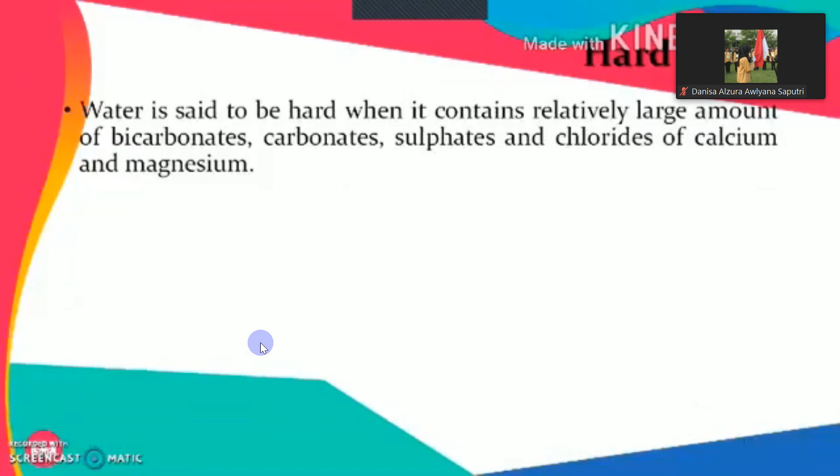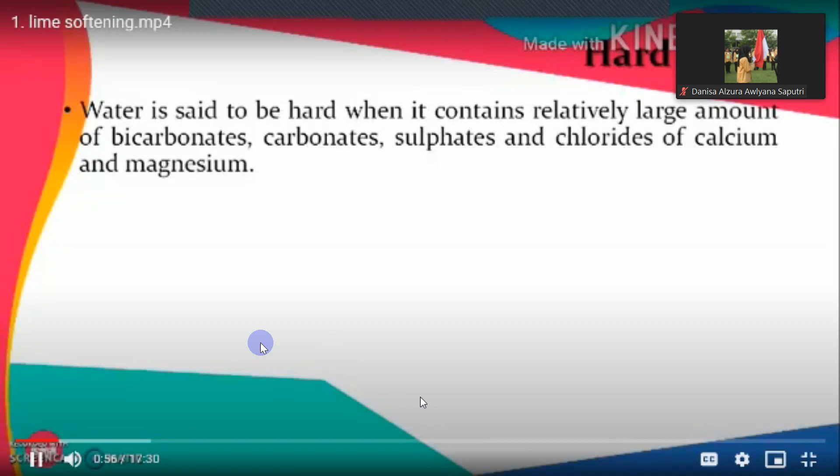So let's start the discussion with hard water. The water is said to be hard when it contains relatively large amount of bicarbonates, carbonates, sulfates and chlorides of calcium and magnesium. Thus, the calcium and magnesium are two minerals.

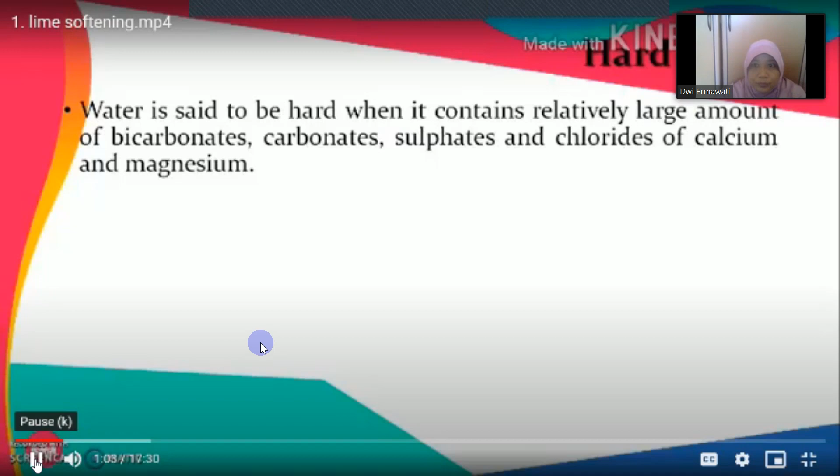Which are responsible to make water hard. These materials generally react with soap causing precipitation, because of which no lather can be formed until enough soap has been dissolved to react with all these things, and it results in not only heavy precipitation.

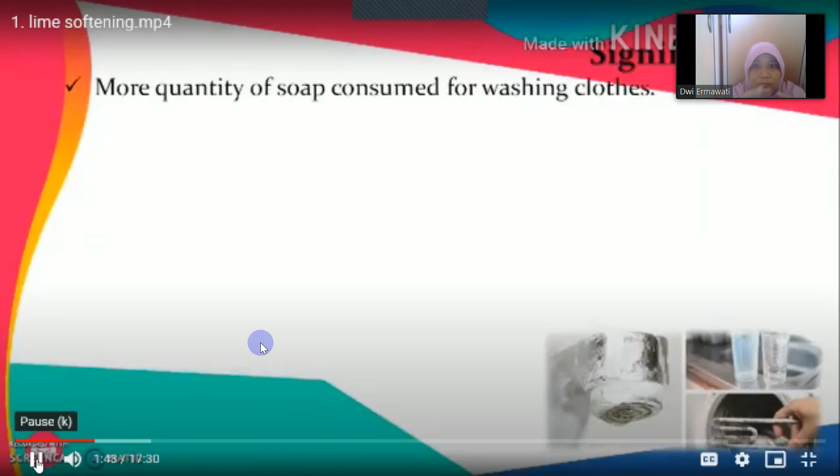But heavy consumption of soap. A wastage of around 25 ppm of soap takes place per 1 ppm of hardness of water removed by it. The significance of the hardness: as we have seen, in case of hard water, more quantity of soap is consumed for washing clothes, because of which even the fabrics of clothes get spoiled.

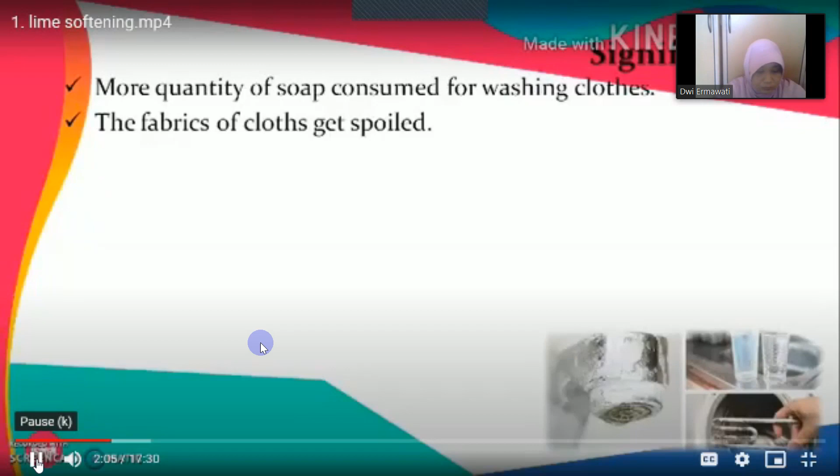This even has an equal significance in its industrial application, as the clothes in industry may be getting spoiled because of the use of hard water in various processes, right from manufacturing to dyeing of the clothes. Then, because of hard water, the taste of food gets spoiled. Stains on utensils and plumbing fixtures are much more common when hard water is used.

Hard water generally results in stains because of the precipitation of the temporary hardness on the surface of these things. Lesser efficiency of domestic water heaters. Then it even causes health issues like kidney stones. In industry, hard water forms scales in the boiler, due to which more fuel is required and the boiler metal overheats.

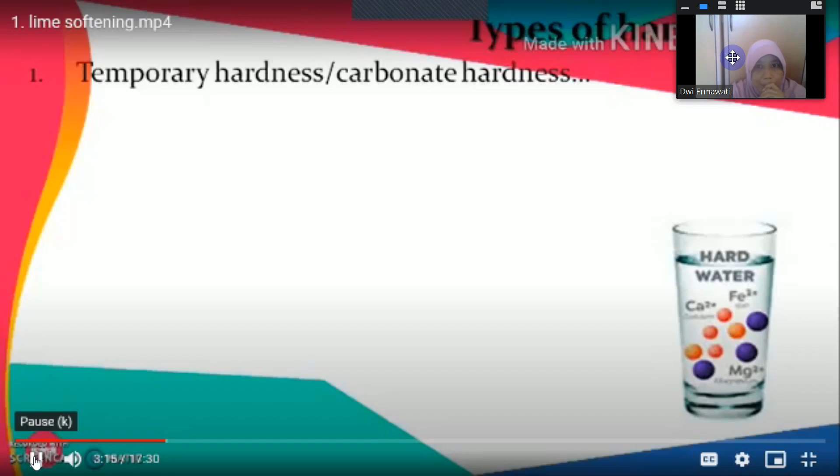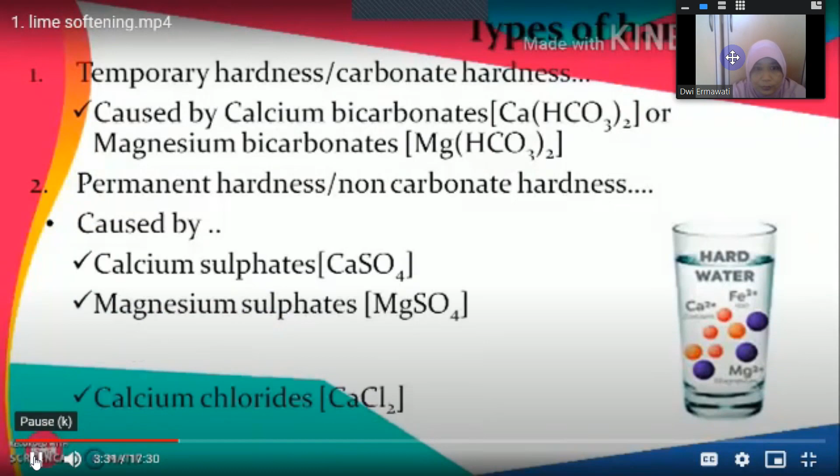The types of hardness. The hardness is divided into two heads, the temporary hardness and permanent hardness. Temporary hardness is even called carbonate hardness. This is caused by the calcium bicarbonates or magnesium bicarbonates. While the permanent hardness is called non-carbonate hardness, which is caused because of the calcium sulfate, magnesium sulfate, calcium chlorides and magnesium chlorides. Even on the basis of the total hardness present in water, the water...

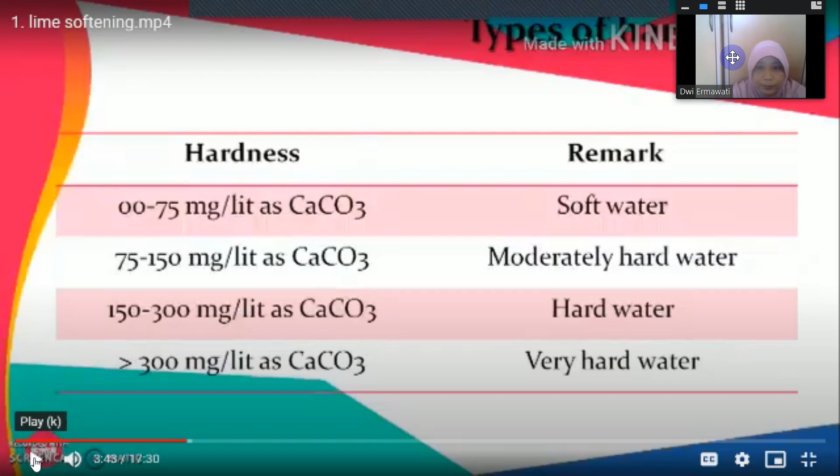Is generally divided under the four heads. If hardness is in a range of 0 to 75 mg per liter as CaCO3, it is called soft water. If that hardness is in a range of 75 to 150 mg per liter as CaCO3, it is moderately hard and is much better for consumption, as our body even needs a certain amount of minerals which can be supplied with the help of such hard water.

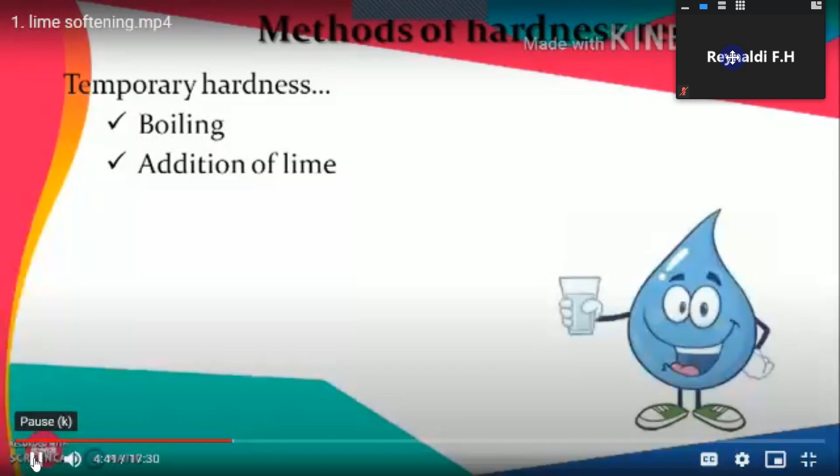If the hardness goes beyond it and is in a range of 150 to 300 mg per liter, then water is called hard water, while more than 300 mg per liter as CaCO3 makes water very hard. Now, how to remove it? The temporary hardness can be removed by boiling or addition of lime. As boiling is not practicable for mass purification, generally at water...

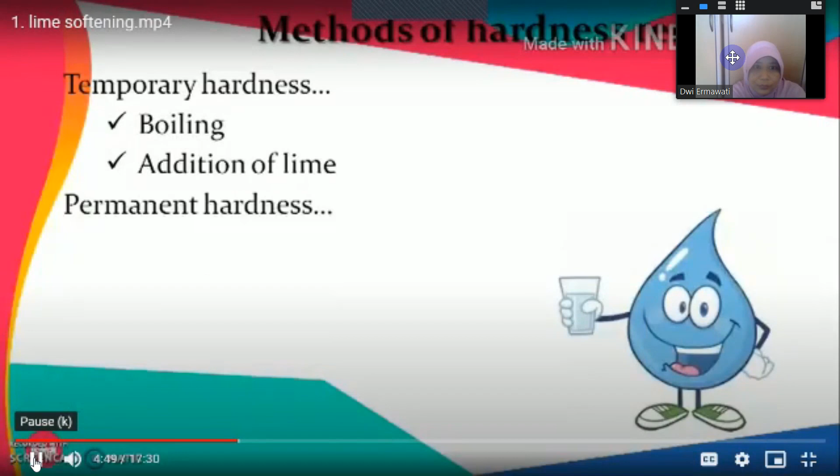Treatment plant, the addition of lime is practiced. While in case of permanent hardness, the removal is possible by using lime soda process, ion exchange method, and demineralization process. In this particular presentation, we are going to learn the lime soda process of removal of hardness.

Now, these are the certain chemical reactions which are happening when water is either heated or we add the lime in it. So when we heat the water, generally the temporary hardness which is present in terms of the carbonate hardness gets precipitated. Generally what happens is that when we heat the water, carbon dioxide gets released, and in the presence of carbon dioxide, the carbonate hardness is generally in dissolved state. But once the carbon dioxide concentration gets reduced, it becomes insoluble and precipitates.

The similar thing happens in case of MgHCO3 too. While in case of addition of lime, the precipitation of the carbonate hardness happens, and because of which the temporary hardness gets reduced.

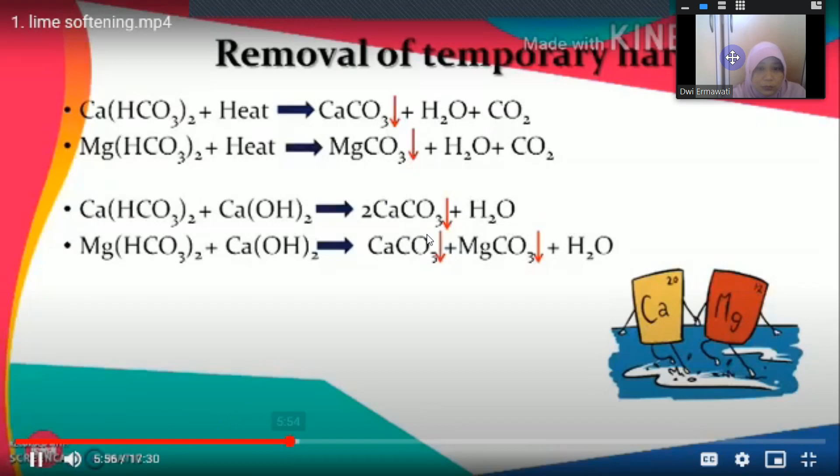In case of permanent hardness, we need to add soda ash along with the lime so that the total hardness can be removed. This is the most common method used at water treatment plants where the expected hardness is to be reduced to a certain level so that it can be supplied.

When lime soda ash has to be done, generally one needs to install the lime soda softening plant. This lime soda softening plant is very much similar to what is practiced in the coagulation and flocculation process, what we have learned in our previous sessions.

These plants generally consist of 4 different units. Those units are feeding or mixing devices, followed by the settling basins, then a recarbonation or stabilization plant, and finally it goes through the filters.

One needs to install the lime soda softening plant. In a lime soda softening plant, lime helps in removing the entire carbonate hardness, while non-carbonate hardness is removed by soda ash. Lime also helps in removing the free dissolved carbon dioxide. The amount of lime and soda ash required for the softening depends upon the chemical quality of water and the extent of hardness removal desired.

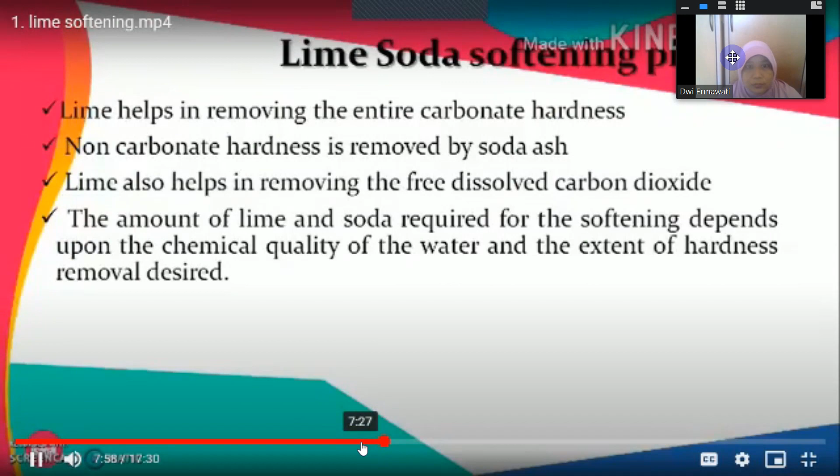The equipment required for lime soda treatment is similar to that required for chemical coagulation. The lime and soda ash are added to raw water either separately or together and are well mixed with water. Flocculation and sedimentation then follow. The feeding, mixing and settling devices are similar to those used in coagulation cum sedimentation. The only difference is that the detention time for the settling basin is higher in a lime soda softening plant, in the range of 2 to 4 hours.

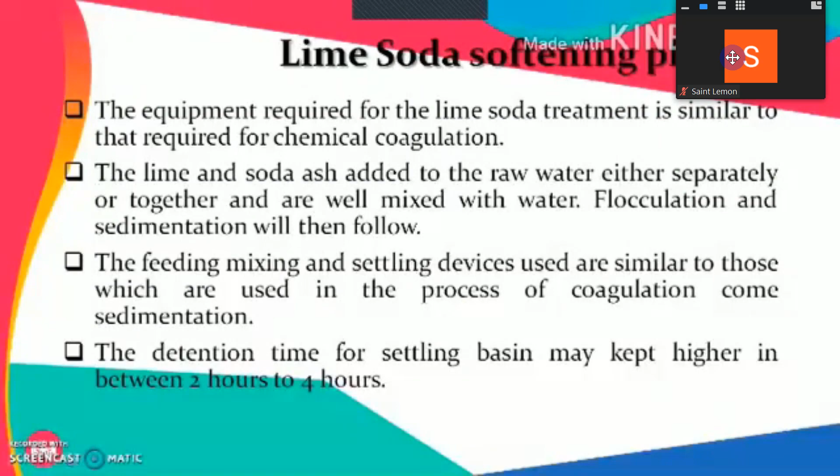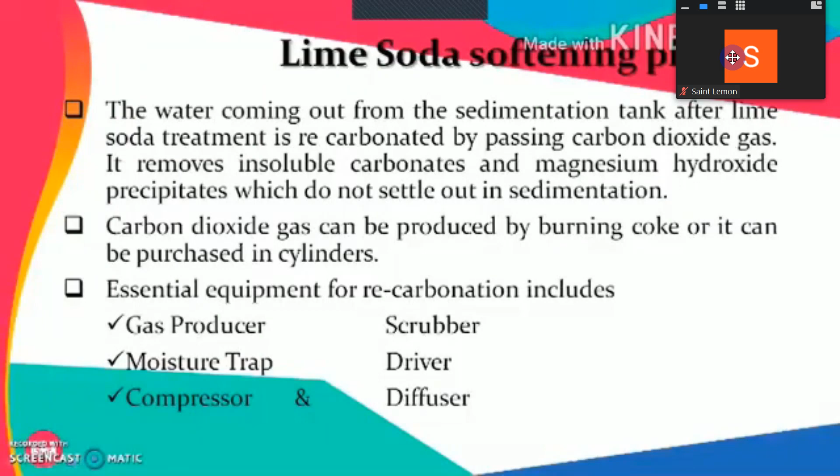Generally, in the lime soda softening plant, the water coming out from the sedimentation tank after lime treatment is recarbonated by passing carbon dioxide. This is the only difference or the additional unit one needs to provide, where one needs to recarbonate the water. This is essential for the removal of insoluble carbonate and magnesium hydroxide precipitates, which sometimes do not settle out in normal sedimentation tanks.

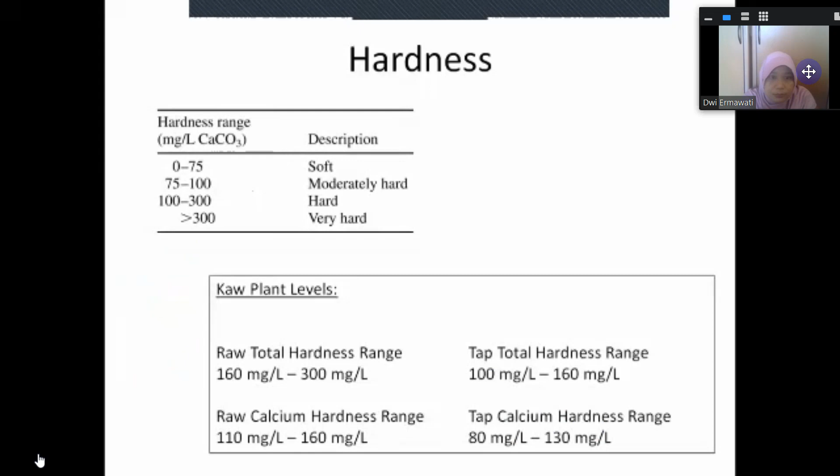Some rules of thumb of when water is considered hard or soft. Anything over 100 milligrams per liter calcium carbonate is described as hard. Typically, we would like our water to be around 75 to 100 milligrams per liter calcium carbonate.

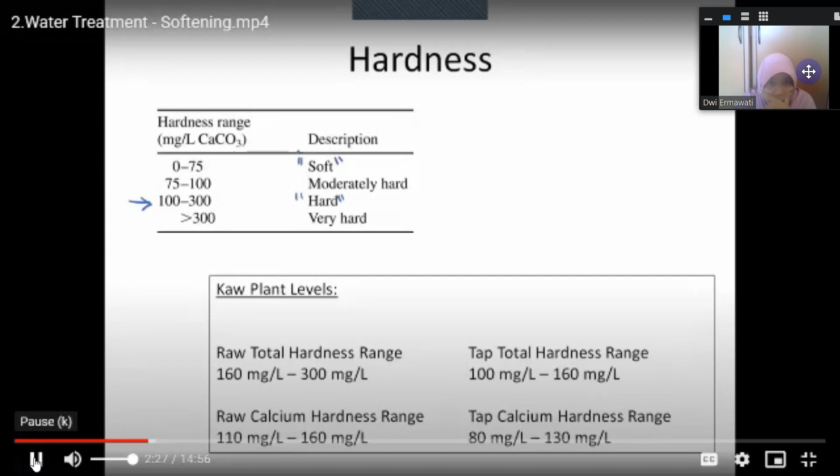Anything that's less than that is called soft and has an opposite problem in that it feels very difficult to remove soap when you're washing your hands. Okay, I said that total hardness can also be defined in terms of the carbonate and the non-carbonate hardness. Carbonate hardness is described as the calcium and magnesium content that is associated with the carbonate anion. So when you have a cation, magnesium or calcium, it would be associated with some sort of anion. And when that anion is HCO3 or CO3, then we would say that it is carbonate hardness.

Now understand that in solution, these are dissociated, however. So carbonate hardness would equal the total alkalinity or the total hardness, whichever is less. Carbonate hardness is actually fairly easy to remove from water systems, and so it is sometimes referred to as temporary hardness because heating the water typically removes it. And that's why hot water heaters have a lot of deposits on them.

Now, non-carbonate hardness is calcium or magnesium concentration that is associated with other anions. So anything other than HCO3 or CO3. And non-carbonate hardness equals the total hardness minus the total alkalinity. It is sometimes referred to as permanent hardness because it is more challenging to remove from water.

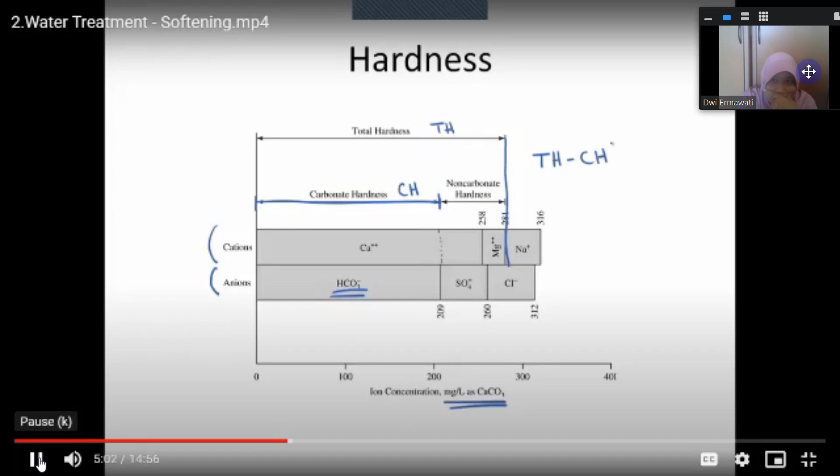But the anion bicarbonate is only paired with a portion of that calcium. And so the carbonate hardness is a subset of the total hardness in this example. The non-carbonate hardness is simply the difference between TH minus CH, total hardness minus carbonate hardness.

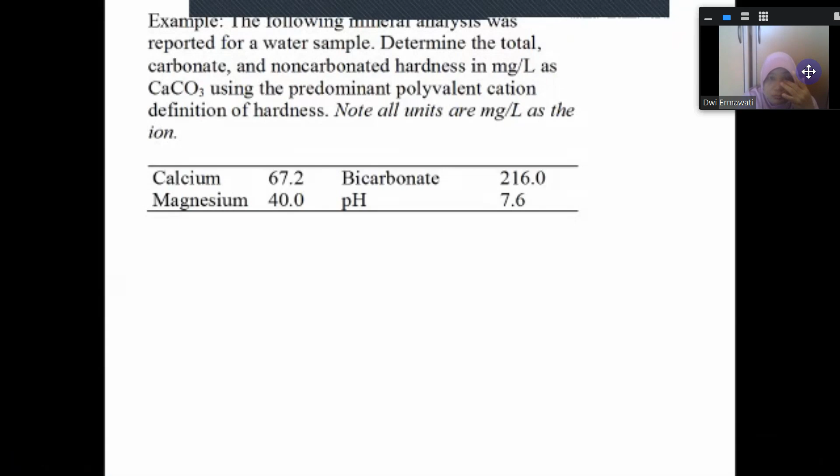We're going to work an example now where I give you the milligram per liter concentrations of minerals, and you're asked to determine the total, carbonate, and non-carbonate hardness in milligrams per liter calcium carbonate. The approach here will be to convert all milligram per liter concentrations to milligram per liter calcium carbonate concentrations, and then to use the equations for total hardness, carbonate hardness, and non-carbonate hardness. I'm going to do my conversions by establishing a table.

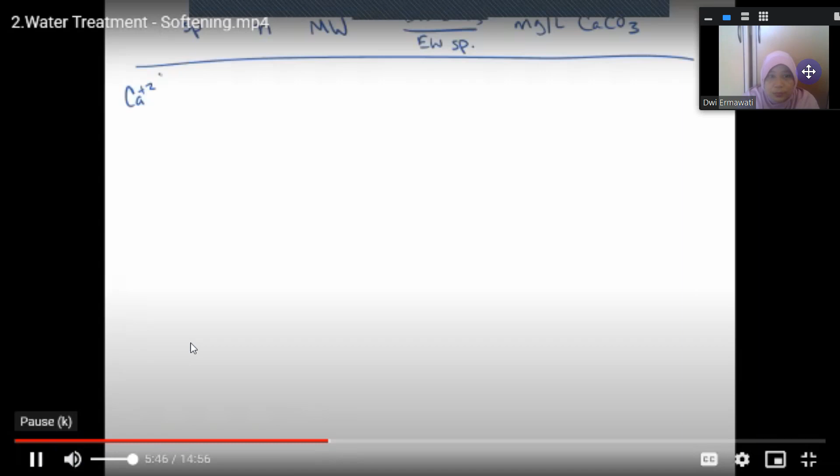Calcium was given as 67.2 milligrams per liter. The equivalent number for calcium is 2. The molecular weight is 40. The equivalent weight of calcium carbonate is 50, and the equivalent weight of calcium will be 40 divided by 2 milligrams per milliequivalent.

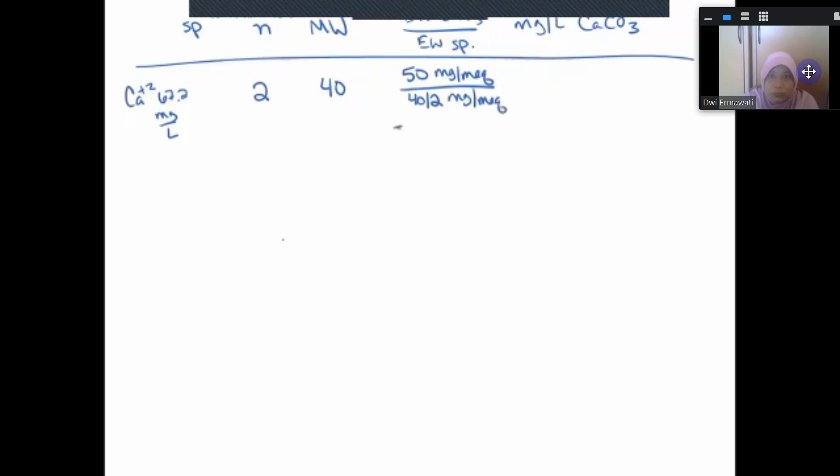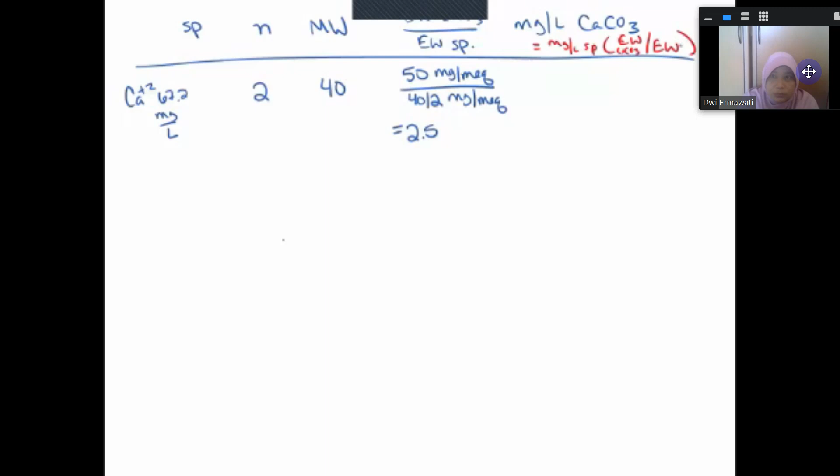This equals 2.5. Recall that the milligram per liter calcium carbonate is equal to the milligram per liter of the species times the equivalent weight of calcium carbonate over the equivalent weight of the species. So I say 67.2 milligrams per liter times 2.5, and this 2.5 comes from here. That is equal to 168 milligrams per liter calcium carbonate.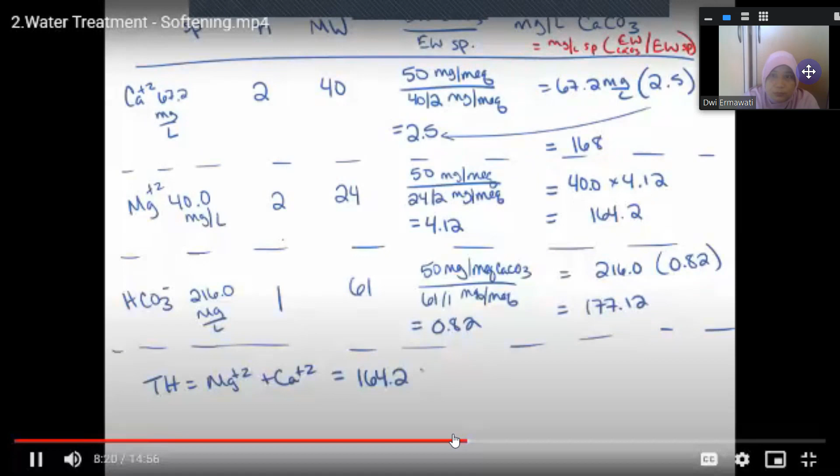The milligrams per liter calcium carbonate. Okay, so the total hardness is equal to magnesium plus calcium in terms of milligrams per liter calcium carbonate. That is 164.2 plus 168, which gives 332.8 milligrams per liter calcium carbonate.

The carbonate hardness is equal to the alkalinity or the total hardness, whichever is less. In this case, alkalinity is 177.12, and that is less than the total hardness. So we will choose the alkalinity as the smaller value, 177.1 milligrams per liter calcium carbonate.

And the non-carbonate hardness is equal to the total hardness minus carbonate hardness: 332.8 minus 177.1 equals 155.7 milligrams per liter calcium carbonate.

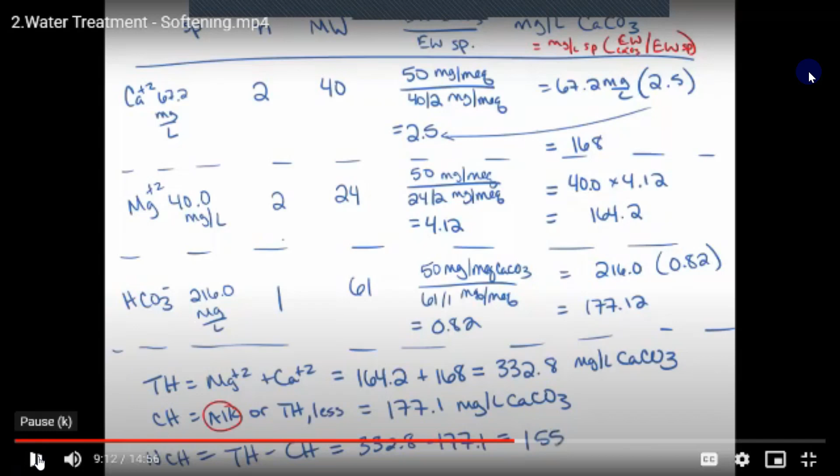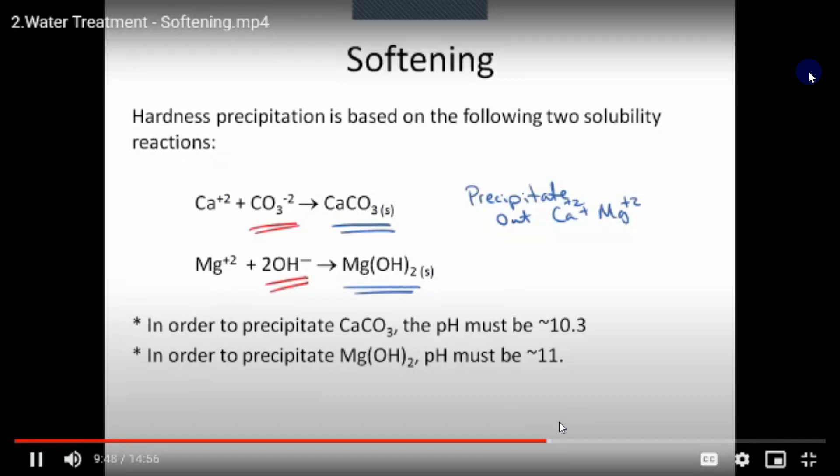And magnesium hydroxide. We remove hardness when we precipitate out calcium and magnesium. In order to precipitate out calcium carbonate and magnesium hydroxide, you must have carbonate and hydroxide ions present. As you'll recall from the carbonate cycle, carbonate ions are dominant after the pK from bicarbonate to carbonate. So for these to be highly present, you need a pH of at least 10.3 to get good precipitation of calcium carbonate. This has to do with the transition from bicarbonate to carbonate in the carbonate cycle.

For magnesium hydroxide, you need a pH of around 11. At a pH of 11, you would have a hydroxide molar concentration of 10 to the negative 3, and this shifts the solubility reaction to the right.

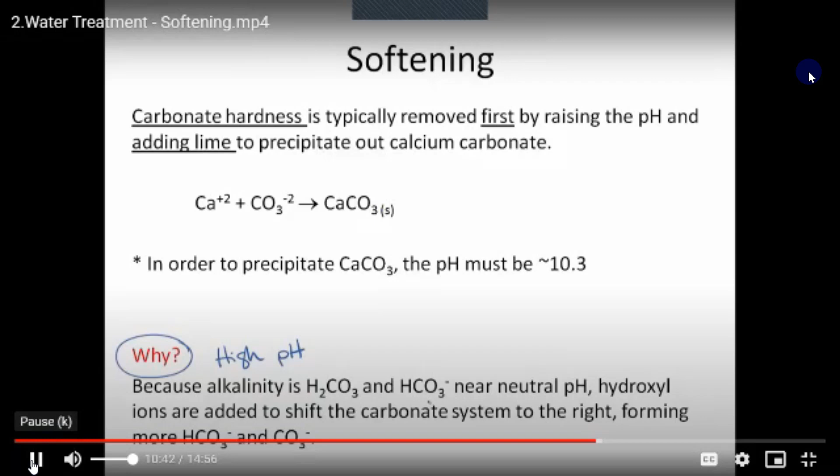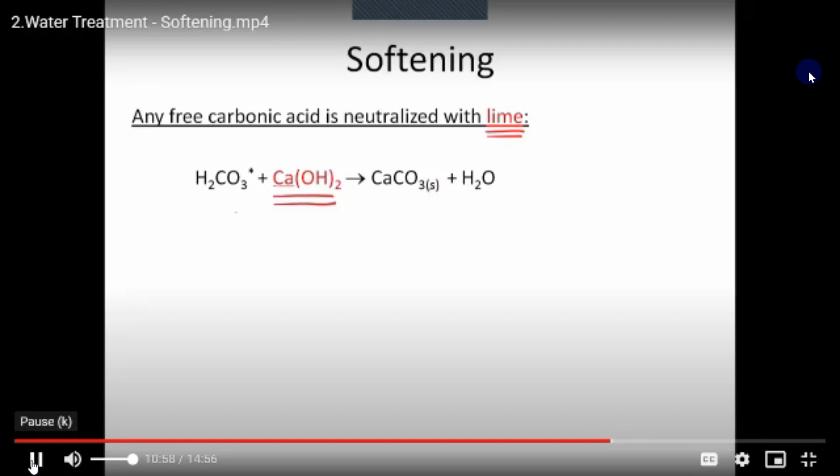Now, if all available alkalinity has been used to precipitate out calcium and magnesium, then you have removed all of the carbonate hardness. Any addition of chemicals beyond that point targets non-carbonate hardness. Non-carbonate hardness requires the addition of sodium carbonate, commonly known as soda ash. It is impossible to precipitate calcium carbonate without carbonate being present. So if all alkalinity is used up, sodium carbonate adds that carbonate and allows for additional precipitation to occur.

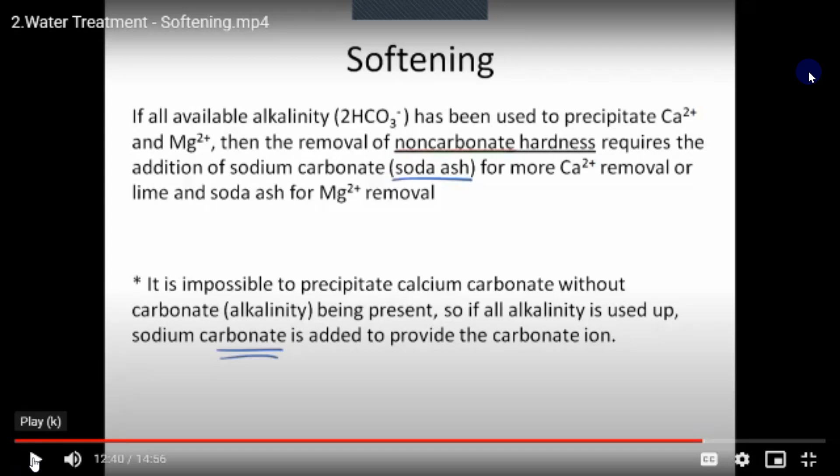So when we're targeting non-carbonate hardness, we add sodium carbonate. The carbonate combines with the calcium to precipitate out calcium carbonate, and it produces sodium. Lime would also be added at this point. The hydroxides in the lime would react with magnesium to precipitate magnesium hydroxide, and the calcium that is released from this would react with additional soda ash to precipitate more calcium carbonate.

So this is the first reaction of soda ash reacting with calcium. This would be calcium non-carbonate removal. And in these reactions, you have magnesium non-carbonate removal, which actually involves two reactions, because in the first, you release calcium, which then has to be combined with more soda ash. Otherwise, you're adding hardness back into the system.

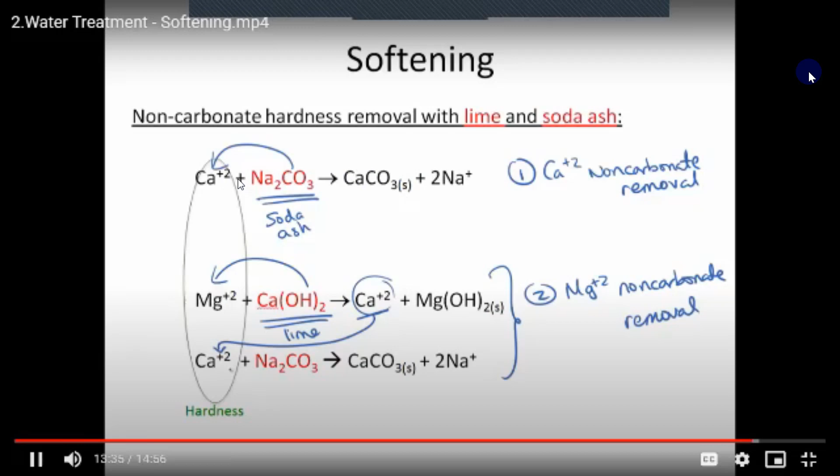Be combined with more soda ash. Otherwise, you're adding hardness back into the system. So in discussing softening, it's important to understand that excess lime softening has the potential to leave residual amounts of calcium in the water. This is particularly true when non-carbonate magnesium removal is performed with lime. The second point to excessive lime softening is to appreciate that you have to raise the pH to greater than 10.3, and if you're doing magnesium removal, around 11.

After you've done the softening and precipitation and sedimentation, it is very critical that you recarbonate the system to bring the pH down. And bubbling in that CO2 recarbonates the water because it adds these back into the soluble form, and it also lowers pH.

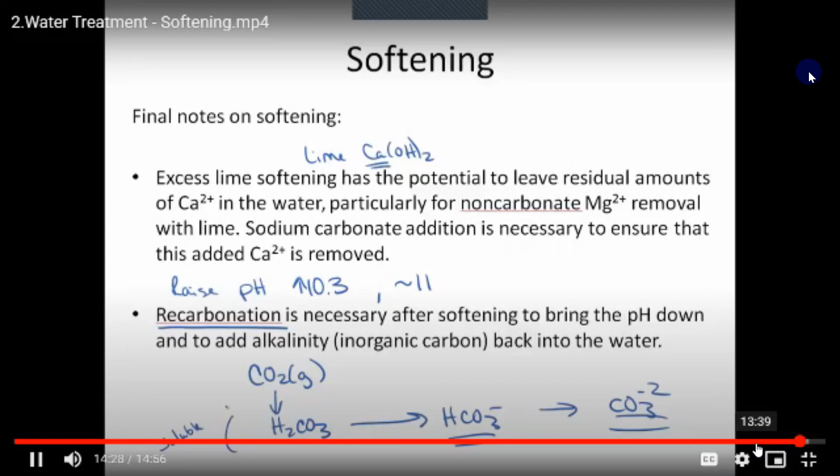Let's see where this fits into the treatment train. If we have a softening plant, you have raw water that comes in, you add lime or soda ash. If you want to do non-carbonate hardness removal, you go through flocculation, sedimentation, and then you recarbonate by pumping in CO2 gas. You finally filter, and you push that softened water into the distribution system.

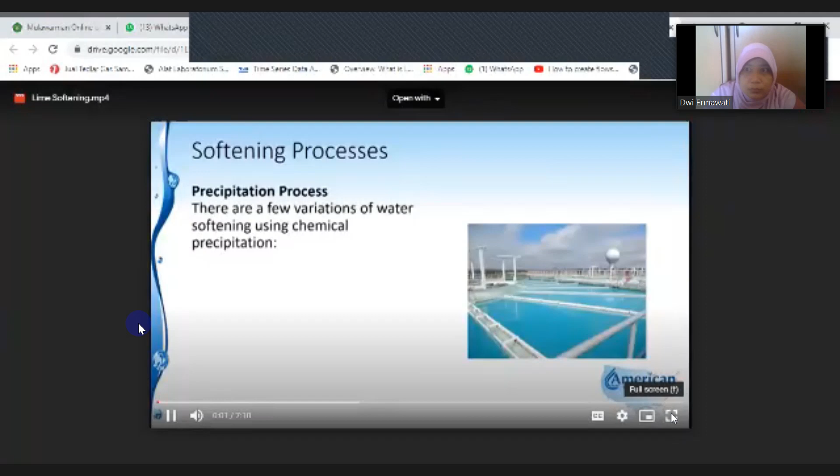There are a few variations of water softening using the chemical precipitation process. There's lime softening. There's also lime soda ash softening. There's also a process called excess lime treatment, and that's used to remove larger quantities of magnesium. And there's also a method called split treatment in addition to caustic soda treatment. Now, the caustic soda treatment is more expensive than the other methods and is infrequently used, so we're not going to discuss that any further in this lesson.

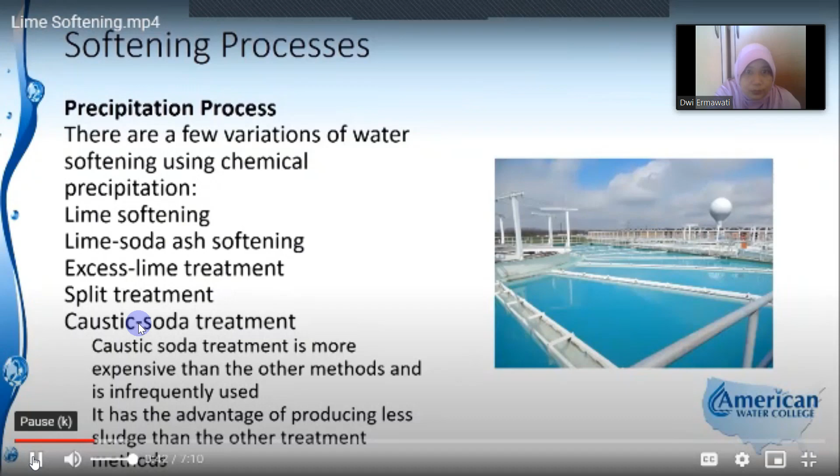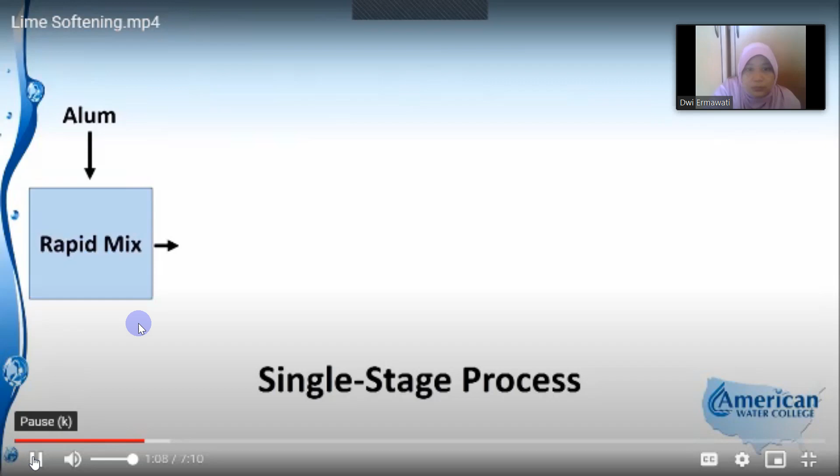However, it does have the advantage of producing less sludge than the other treatment methods. Well, let's take a look at the most common method of softening water, and that's the single-stage process. And it's very similar to a conventional treatment plant in that it starts with a coagulant added, and in this case we're showing alum being added to the rapid mix tank. And then the water and the alum and the coagulated water moves on to the flocculation chamber. From the flocculation chamber, it goes into the settling basin.

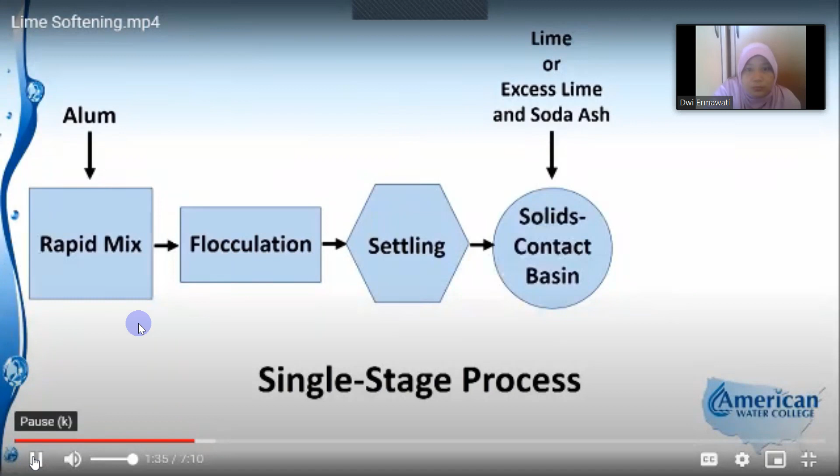And then from there, this is where we begin the softening process. It flows into a solids contact basin. And to the solids contact basin, we add either lime or excess lime and soda ash. It depends on the makeup of the water and what we're trying to accomplish. Well, calcium begins to precipitate out at a pH of 9.4. And if our hardness is primarily due to calcium hardness, we might just add lime and raise the pH to 9.4 in the solids contact basin, and that will provide the softening for us. But if we have a considerable amount of magnesium, say greater than 40 milligrams per liter, we might use the excess lime and soda ash method, in which case we'll raise the pH to 10.6.

Well, following the softening portion where we add the lime or the lime and soda ash, we have to bring the pH back down because high pH water would cause a problem with several things. One, the disinfection process, but two, it'll cause scaling in the distribution system. So we send it through what's called a recarbonation process, and that's where we add carbon dioxide to the water, and that brings the pH down to a range of 8.6, so it's more stable.

So this right here is what we'd call the single stage softening process. From here, once we've recarbonated the water.

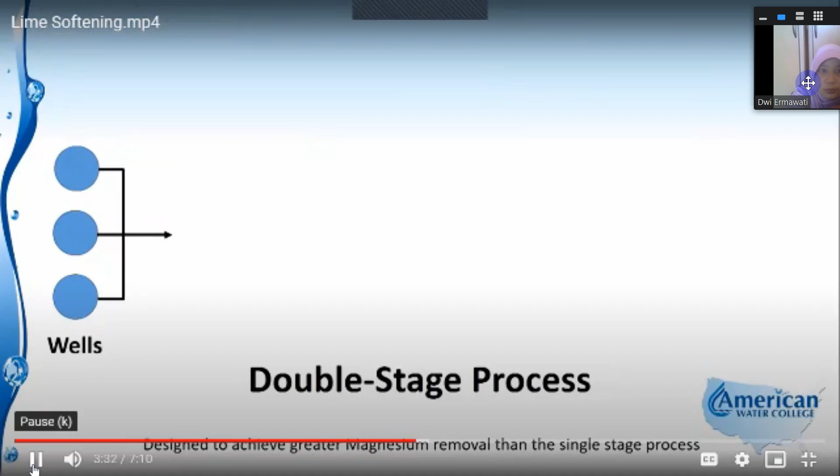And for our example here, we're going to take some groundwater from multiple wells and send them to the treatment plant. Because this groundwater is too hard, we're going to send it through a double stage process. So the first part of the process is we send it to a solids contact basin where we add excess lime. So again, because we're trying to remove magnesium, we're going to add extra lime to get the pH up to 10.8 or thereabouts, anywhere over 10.6 to get the magnesium to precipitate out.

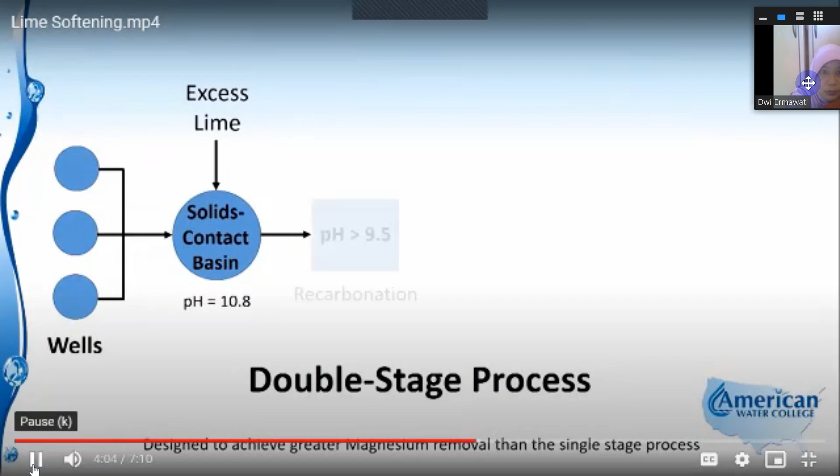After that process, it goes through a recarbonation process where we bring the pH down, but we don't want to lower it below a pH of 9.5 because at 9.4, 9.5, that range is where the calcium begins to precipitate out. So this first stage, we raise the pH to 10.8, and that's primarily to deal with the magnesium in the water. And then we move on to the second stage of our double stage process, and we send it to another solids contact basin where we add soda ash.

Then we send it through a recarbonation process again. That's the second stage. Now this second stage where we add soda ash, we do that to remove the non-carbonate hardness. Okay, so the first stage is removing the carbonate hardness, and the second stage is intended to remove the non-carbonate hardness, and that's why we add the soda ash.

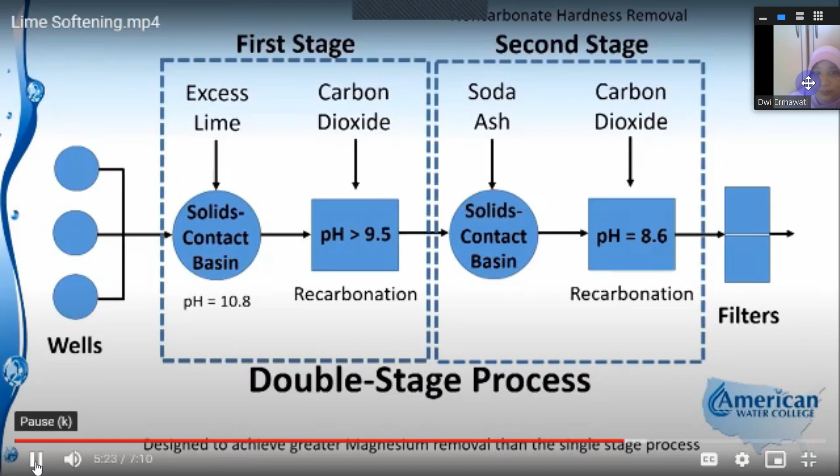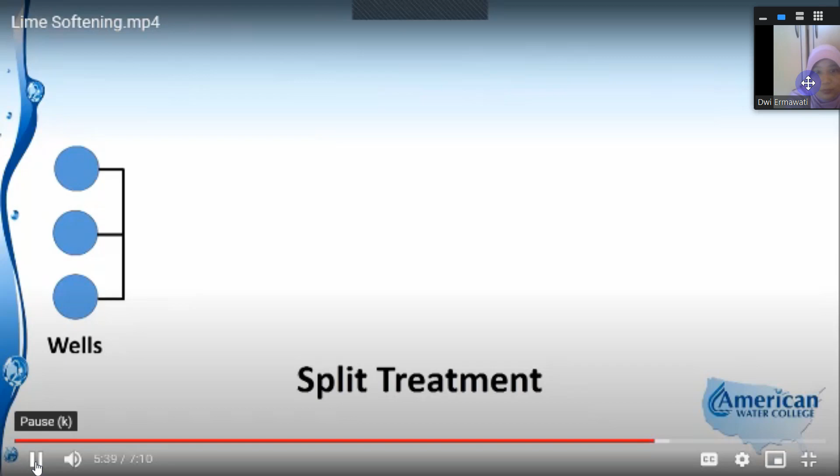This last method is called split treatment. This is a variation of the softening process intended to reduce chemical usage. And it's basically you're just splitting your flow stream. So assuming we have some wells, some groundwater that's hard, it'll flow into a flow splitter. And from there, it'll go one of two places.

It'll go into the rapid mix, where we add some polymer or some type of coagulant, and then into a solids contact basin, where we add lime or excess lime, depending on what our treatment objectives are. And then it'll flow from there into the next process.

But back to the flow splitter, we can bypass the rapid mix and the solids contact basin through this flow control valve, and this allows us to treat part of the water. So we're bypassing some of the flow, which is going to maintain the hardness and the alkalinity, and a portion of the flow we'll treat.

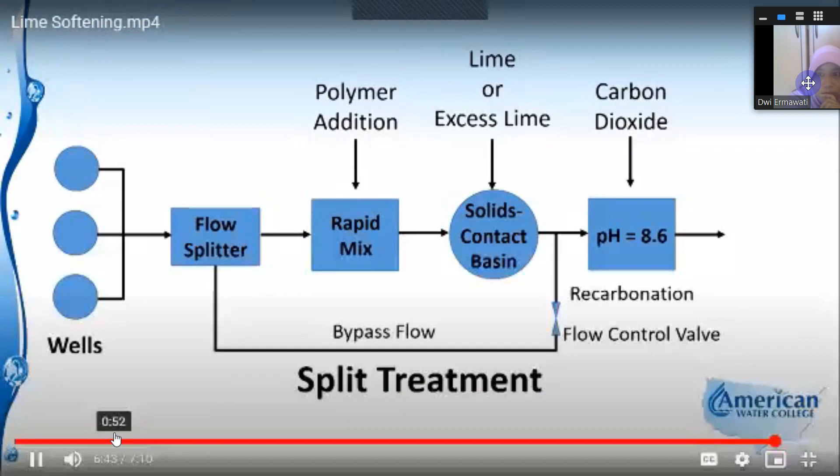Both flow streams meet up and go into the recarbonation process, where carbon dioxide is added and the pH is adjusted to 8.6. And then from there it flows on through the filters and then to disinfection and then into the system. So the split treatment method is primarily just a way to reduce chemical costs by treating only a portion of the total flow.

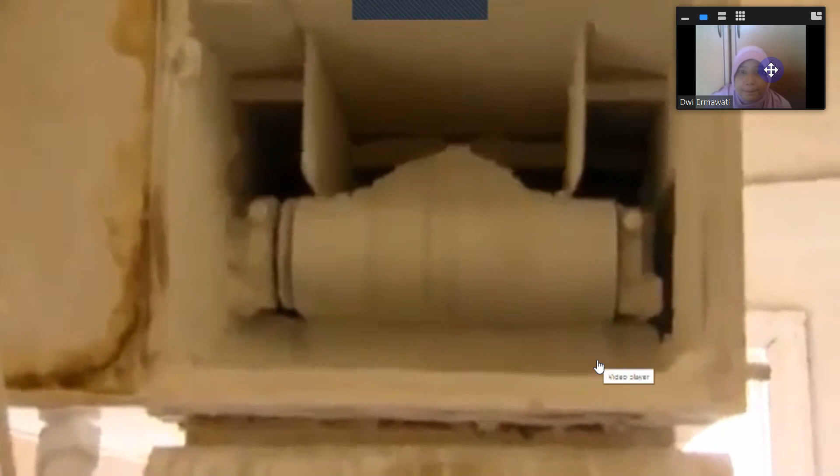What you see in this photograph is a slaker. This is the very bottom of the lime silo. The lime comes out and it goes on that little conveyor belt that you see there. Down at the bottom, it mixes with a little water and creates this cake dough-like stuff.

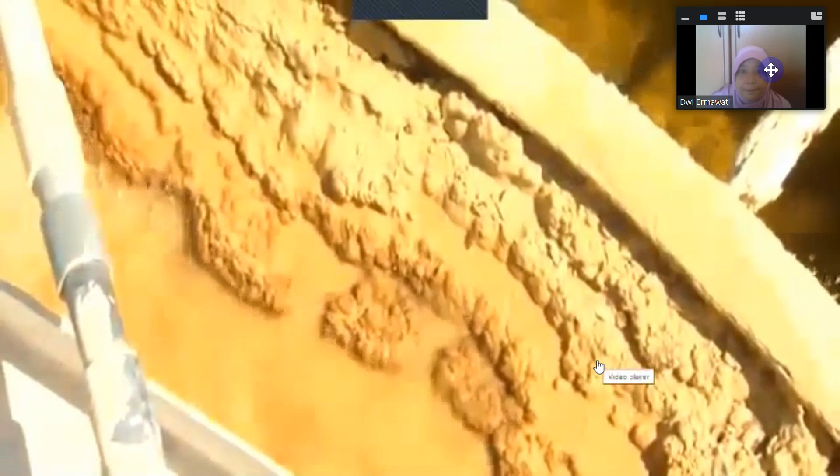It's then quickly pumped into another vessel where we mix it with more water so that we can pump it into the reactor system. The reactor is seen here. You see that yellowish, milky-looking water. That's the lime slurry mixed with the raw water. This water has some organics in it, so the color tends to take greater pigment. But lime mixed with water is generally going to be white.

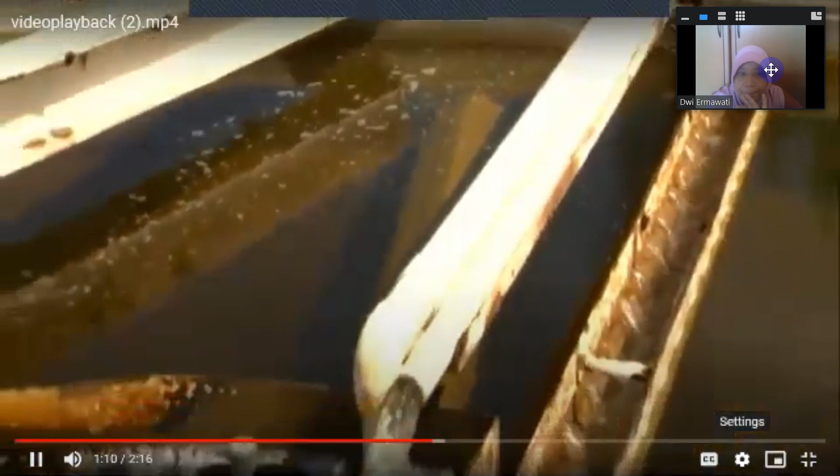You also note in the basin outside, the clarifier portion of the reactor, how clear that water is. That's because the lime softening reaction is a very fast reaction. It occurs within a matter of minutes. What we're going to do here is show you how fast this reaction occurs. I'm going to take this dipper and put it into the lime system, and we're going to see how fast this actually comes out.

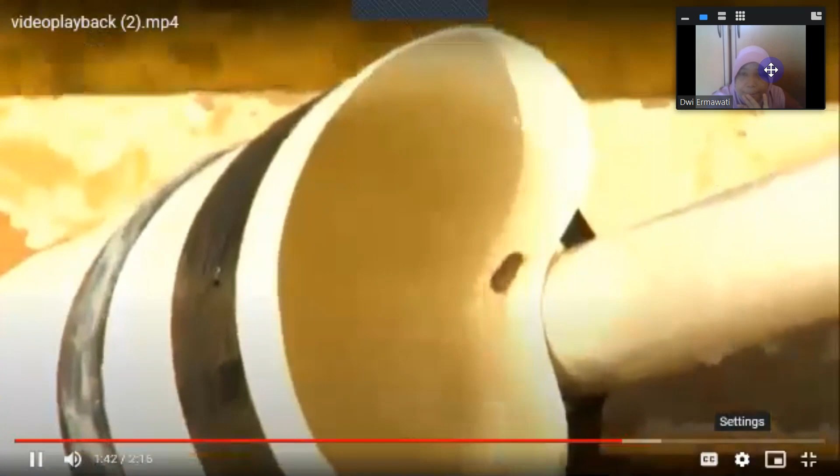So I set it here. You can see the water's starting to settle very quickly. Lime softening is a chemical reaction. It's going to settle a little bit. You can see the floc trying to stir and settle. And then I'm going to tilt this and I can decant off the clean water off the top, and we'll see the lime sludge down in the bottom.

So you can see down in the bottom a bunch of bright white material. That's actually the lime sludge. And ultimately, within a minute here, I can actually decant off virtually all the water, leaving the lime sludge behind.